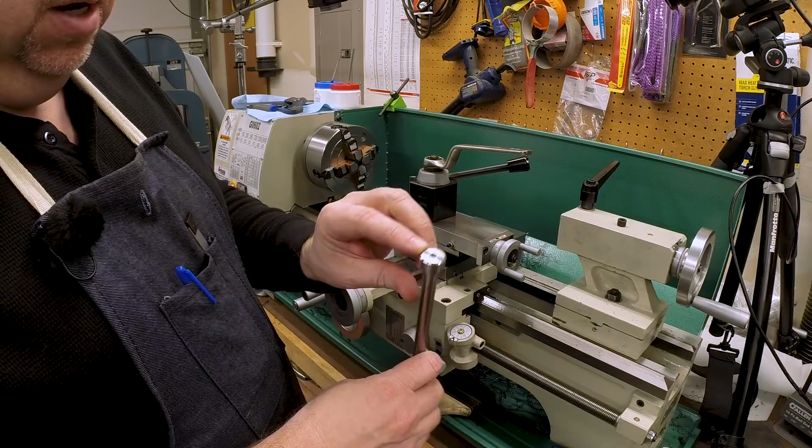Okay, that's the overall shape of the drawbar. We're going to have to put some flats on this end in the mill in a little bit, but next thing we need to do is turn down the end of this to a 1/4 inch and thread it 1/4 28.

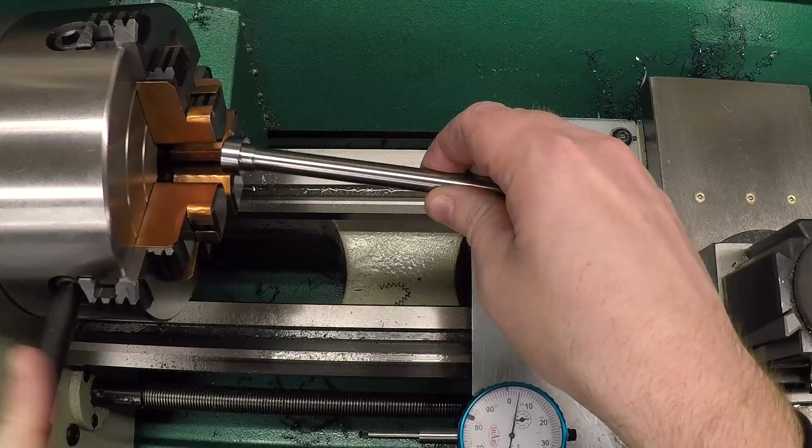I think I can open this up enough with just 2 jaws to get that in there. With any luck, we'll still be close to centered up. Let's get an indicator.

Okay, make sure we're going to have 800 thousandths we need to turn down. I can probably pull that back just a bit. Make the setup just that much stiffer.

You can't see that, can you? That better? Yeah, that's better. Okay.

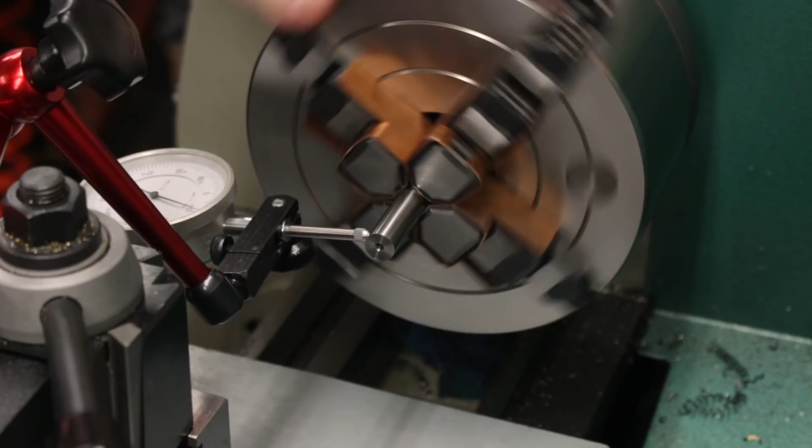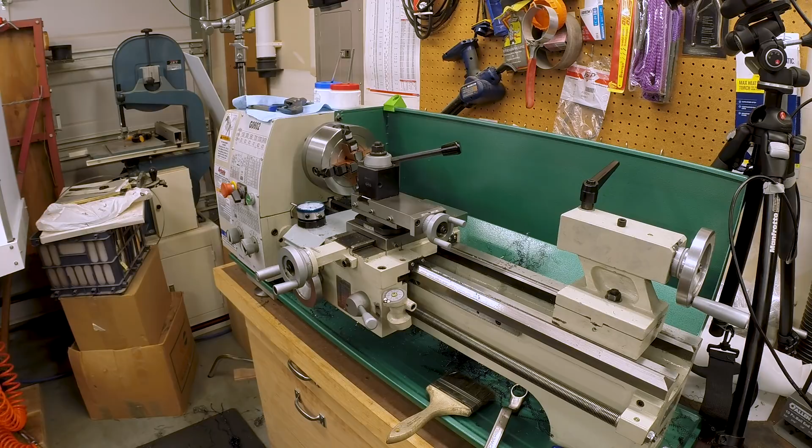No, these other jaws were loose. It's less than 1/2 thou. Let's make sure everything's really tight. Yeah, we're really on it. I'll deal with that. Less than 1/2 thou works for me.

Let's spin this up nice and fast.

Okay, I'm just going to lightly touch the end here, and then I'm going to bring the indicator out. Zero that. Then I'm going to go in 800 thousandths. 1, 2, 3, 4, 5, 6, 7, 800.

I'm going to lock this temporarily just so it doesn't move on me while I'm screwing around with the indicator. Okay. And then we'll set a 0.

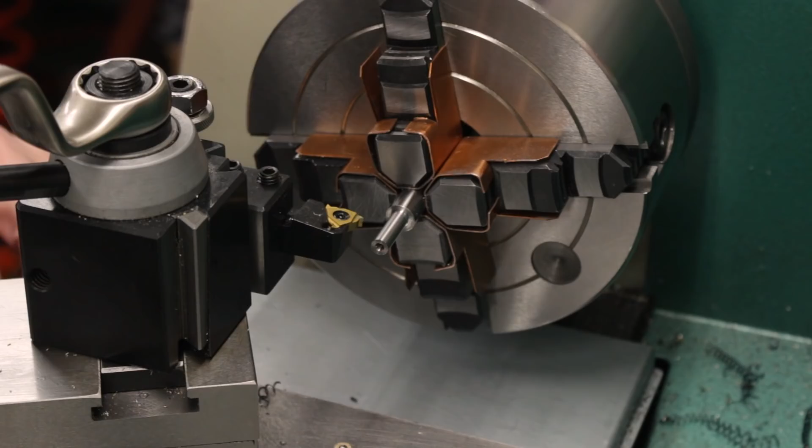Okay, I've got the change gears set up here to run 28 threads per inch. Haven't tested it yet. And I've got a carbide threading tool. Should be set up now to run at 150 RPM, nice and slow.

Now the first thing I want to do is come in here and put a little thread relief in the back. Ideally, we should be running with a flank length of about 25 thousandths, so that's about how much I'm going to feed in, maybe 30 thousandths on the compound as I'm cutting the thread relief. That should put us just about where it's going to be on the final thread.

Come in here and touch off. And that's where I'm going to set my 0, and I'm going to feed in with the compound.

There's 5 thousandths, 10 thousandths, 15, 20, 25.

And I think I'm going to go all the way to 30. So there's 30. And that is our thread relief.

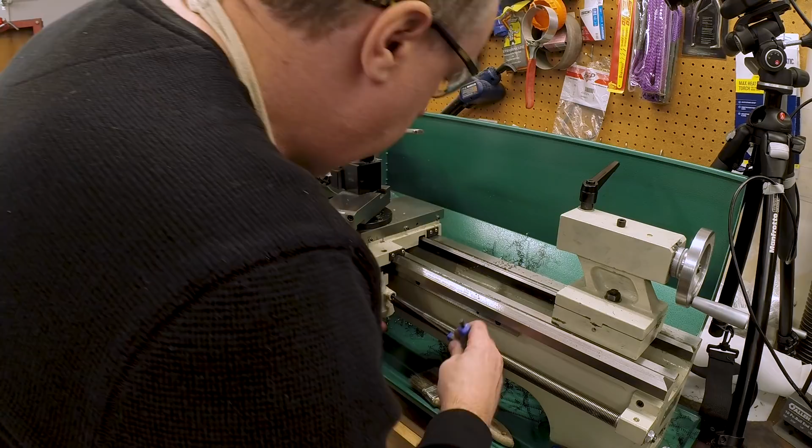Get my thread dial engaged. And I'm going to make a scratch pass and then check it with the thread gauge. Make sure we're really at 28 threads per inch.

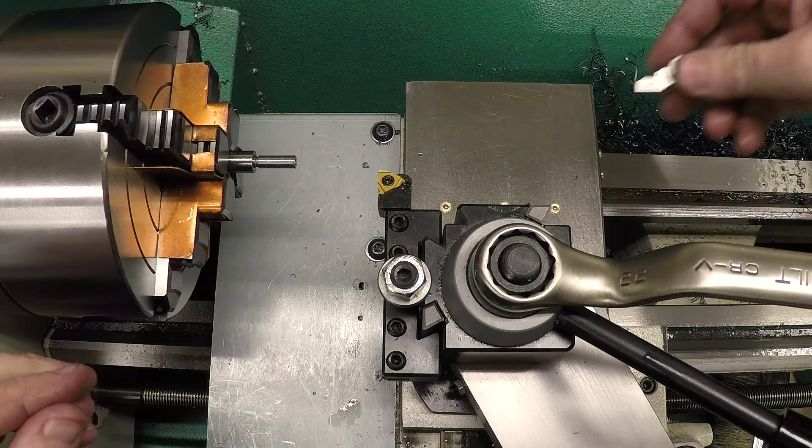It's 26, 27, there's 28. Yep, that looks like 28. We're in business.

Okay. Let's cut some threads. Let's take a 3 thou pass, nice and light, just to make sure everything's looking okay.

That looks good. Take a few more. Waiting for my number to come around here.

That's nice, no discernible rock. Let's clean those threads up a little bit, see where we end up.

I'm not moving the compound, so I can always come back with the other tool.

No discernible motion, but it's nice and free all the way to the bottom. I will take that.

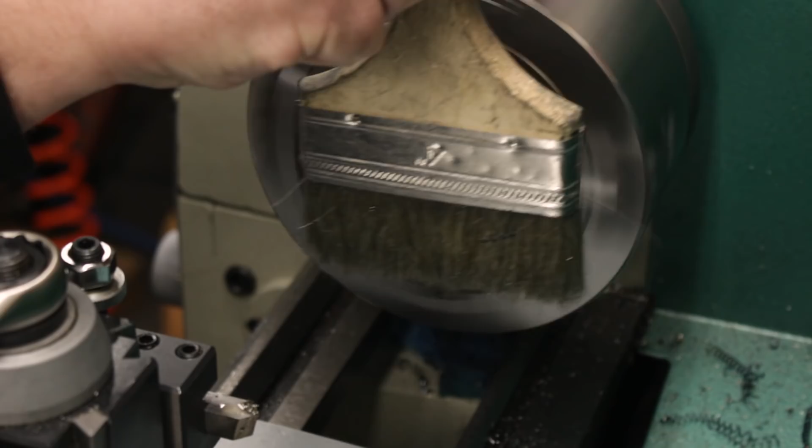That's going to be great. Nice tight machinist fit. The reason I care about this, and the reason I went to the trouble of single pointing these rather than just coming in with a die, well besides the fact that I don't have a die in this size, or a die holder - that's a future project, that video will be coming someday - the reason I wanted to single point these is because I wanted the concentricity to be as exact as possible and the fit to be as tight as possible.

There's a register on the other end of this drawbar in order to make it fit tightly into the spindle, and that supports one end and keeps it concentric, and then the threads in the collet are on the other end, and that's what keeps it concentric on the other end. That keeps the mass of this drawbar, when it's spinning in the spindle, centered so it doesn't cause a balance condition.

Well, I think that's it. We just need to go over to the mill now and put some flats on it.

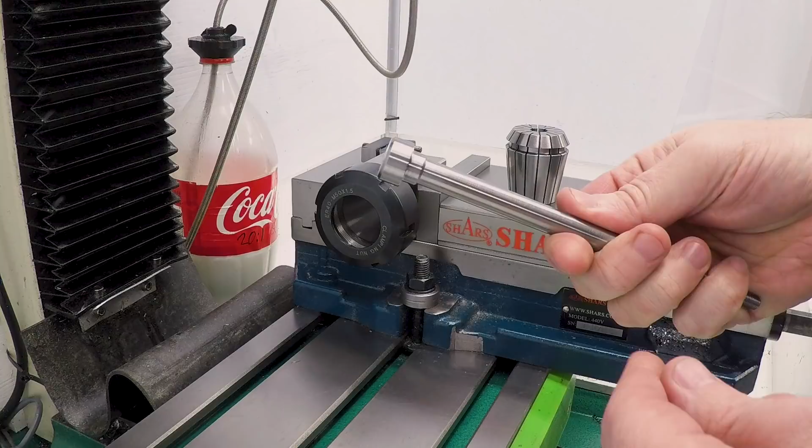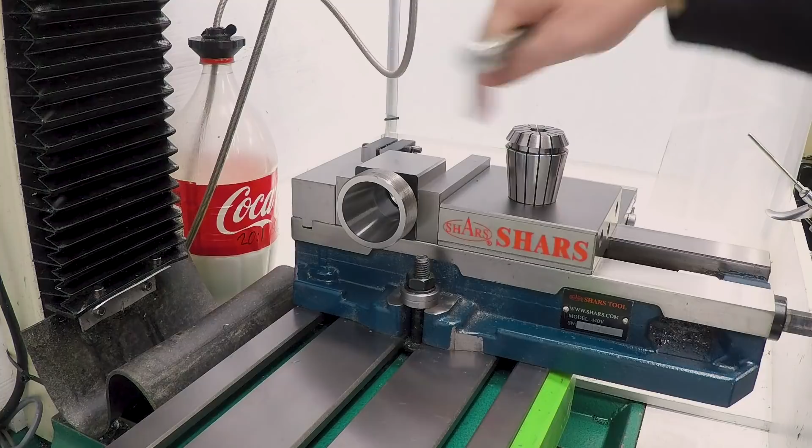Okay, to put flats on the end of the drawbar so that we can turn it, we're going to hold it in a collet block here in the mill, and I've got this set up. This is a square collet block, ER40, and I have it set up in the mill vise against a stop so that I can flip it over and reclamp it in the same position.

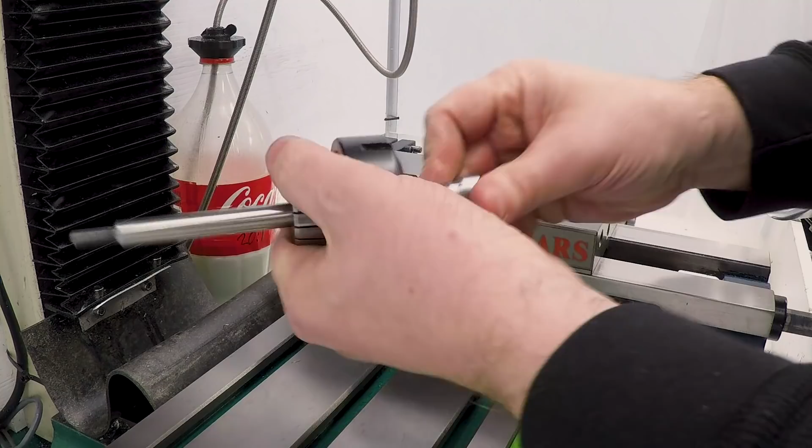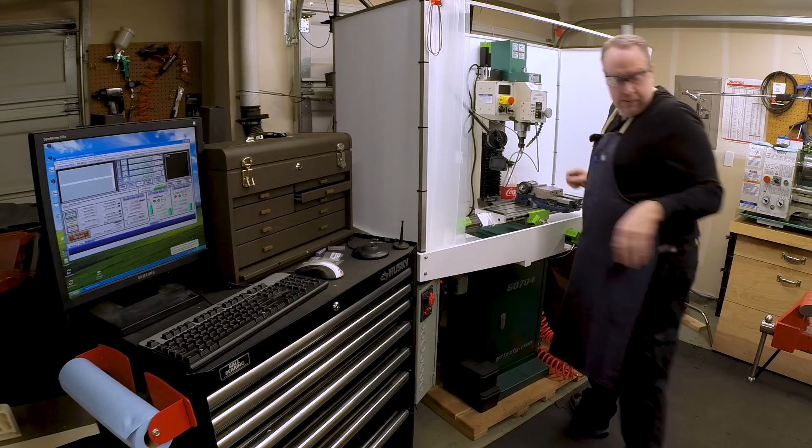So this is turned to 7/16. I've got a 7/16 collet. Snap that in. Mount the drawbar. I got a wrench here to tighten down the nut.

Okay, I've got a 1/4 inch carbide end mill, and I'm going to bring it down and just find the top, touch off on the top, then bring it down the correct distance and touch off on the side and use that as a zero.

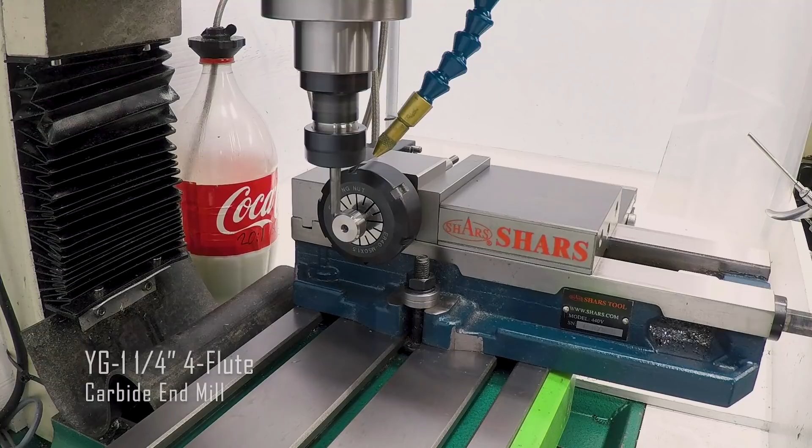Okay, there's my Z0. Then we'll come off of the part. Now let's see, how far down do we have to come? We're at 750 and we're headed for 630. Let's make sure that we really are 750.

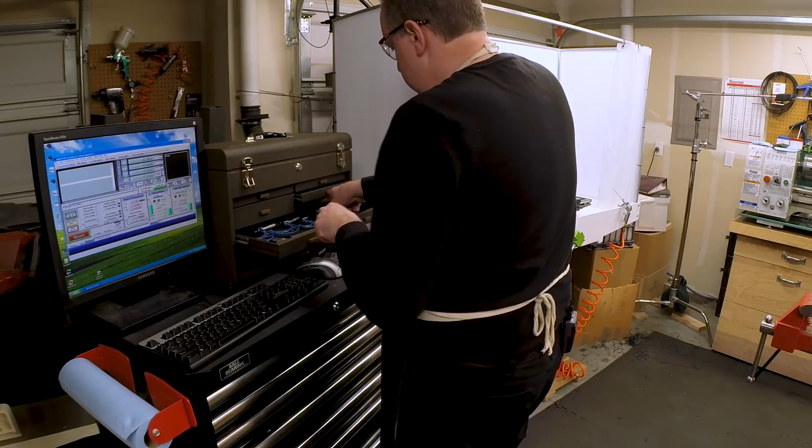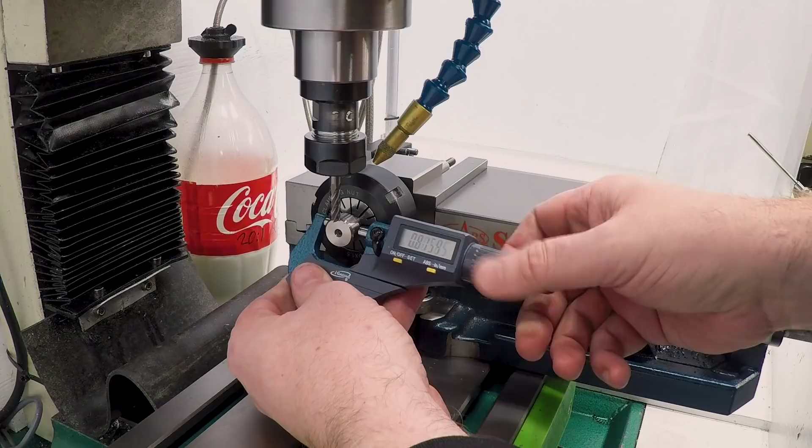Okay, I got the mic zeroed, it was a little bit off. A little bit concerning, okay, but yeah, there we go - 749.85, so we're at about 750. It's exactly what I expected, and we're going to try to go to 630 across the flats.

So we need to take off 120 thousandths, divide by 2 is take off 60 thousandths, and I think I'm just going to dial down 55 thousandths.

Okay, and then we'll come in until we touch. There we go. So I'm going to zero the X there. We'll come off the front, and total we need to go in 250 thousandths.

So let's go in half of that. Let's try 2 inches a minute at first and just see how it cuts. That's going well. Let's put a little coolant on there.

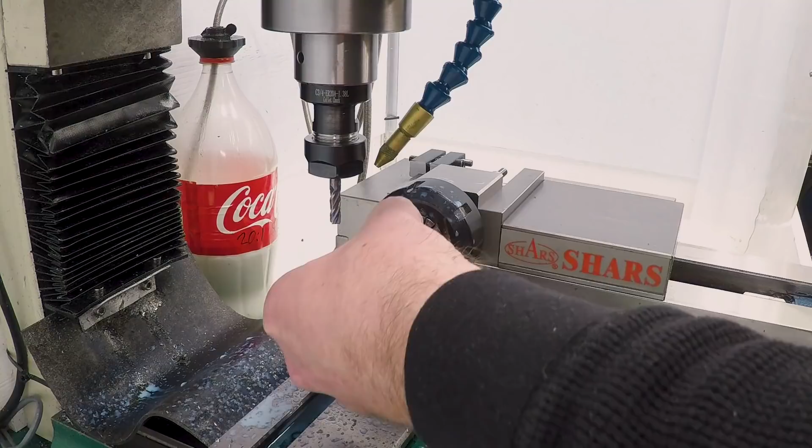See if we can get in this way. Looks like we're right about 627. That is going to be close enough. So what that means is the 16mm wrench should fit on that. Here's a 16mm wrench - there's a little bit of a burr, but that fits beautifully.

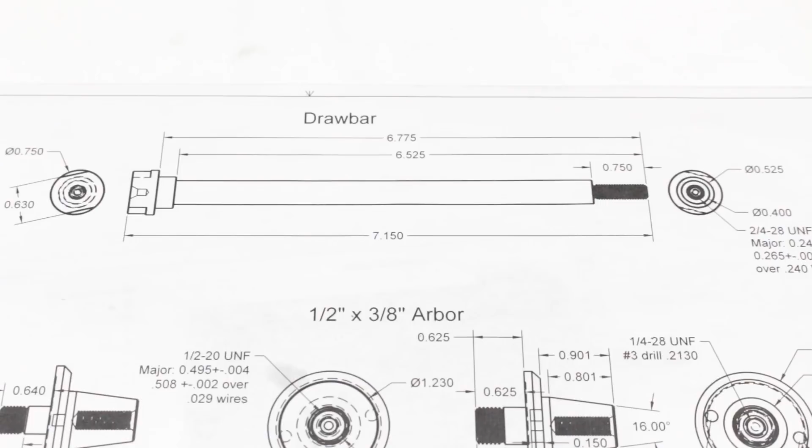Okay, we're done. Let me break this down. Let's go over to the bench and take a look. Well, that is the drawbar complete.

We've got the body turned to diameter, we've got the register so that it fits, we've got the threads cut on the end, and now we've got flats on the other end to turn it with a wrench.

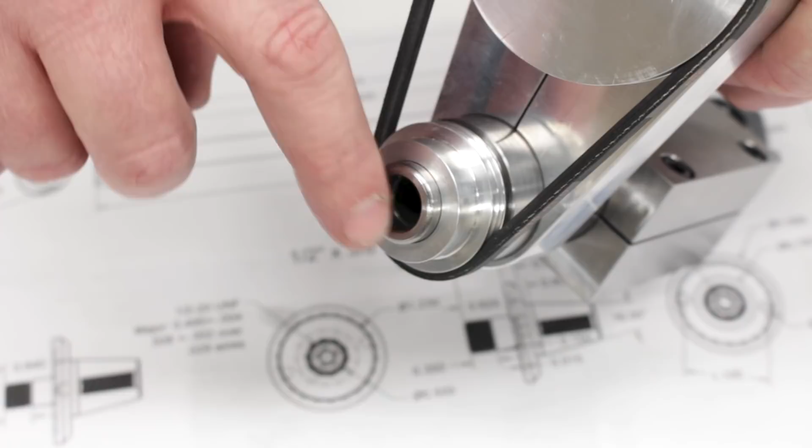Let's see how it fits. If you remember, way back at the beginning of this project, we hard-bored a register in the back end of the spindle here. Now this is hardened material, and the center hole was just drilled, so it wasn't concentric, and I didn't want the drawbar flapping around in there, so I bored a register, and that's what this step on the back of the drawbar is for. So the drawbar slides in, that register engages, and it just fits perfectly.

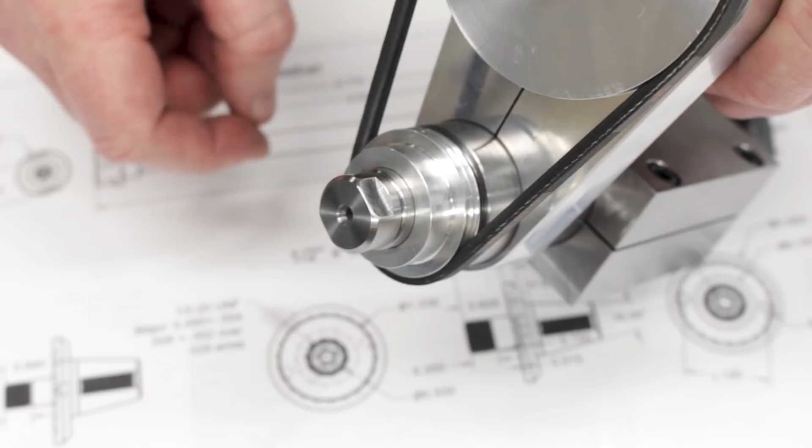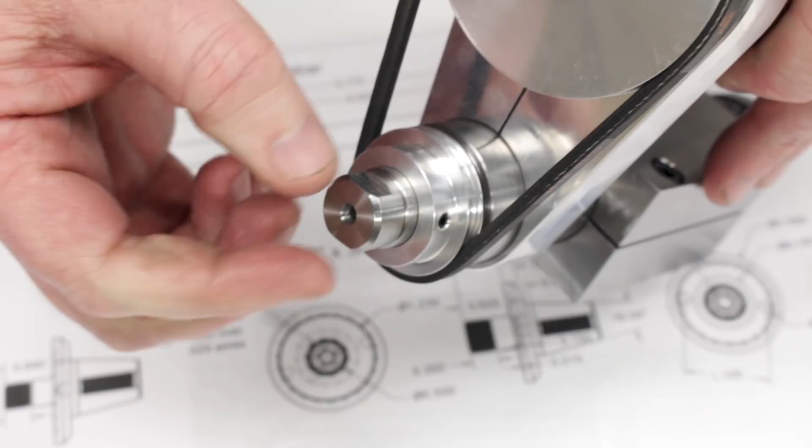There's no play in that at all, but at the same time, it turns easily. So that is going to be just perfect. It's going to stay centered, and the flats are just perfect for a 16mm wrench. So I think that's going to work well.

That's it for today. Next time we are going to start on one of the wheel arbors.